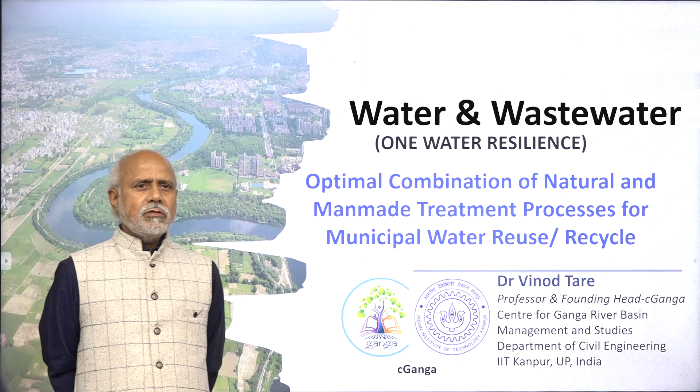This is particularly with the objective of reuse and recycle of municipal wastewater. As is abundantly clear now, municipal wastewater treatment and reuse is an acute need in developing and rapidly urbanizing countries like India.

Typically with increase in water demands and dwindling freshwater availability, as well as increasing wastewater generation in urban centers.

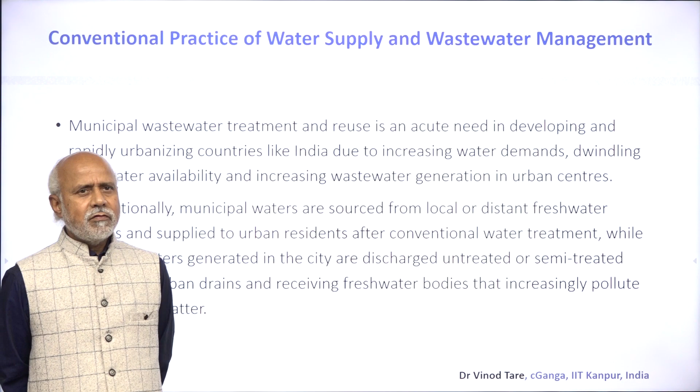These days, almost no surface water resources are spared from contamination with some or the other kind of wastewater, mostly domestic wastewater.

Typically, in most of the urban centers, water is brought from a long distance, and the sewage is also taken over a long distance and treated downstream.

This scenario does not ensure cleaner water bodies in the urban localities. Drains, subdrains, and urban water bodies remain dirty as they were earlier.

Communities do not get benefited from this model. Hence, there is very little incentive or motivation for urban local bodies, ULBs, to spend their limited resources on treatment of sewage.

And hence, ULBs pass on their responsibilities of managing sewage to the state, central, or federal government, in violation of the globally accepted polluter pays principle.

Possibility of achieving appropriate treatment of urban sewage in India is very difficult, if not impossible.

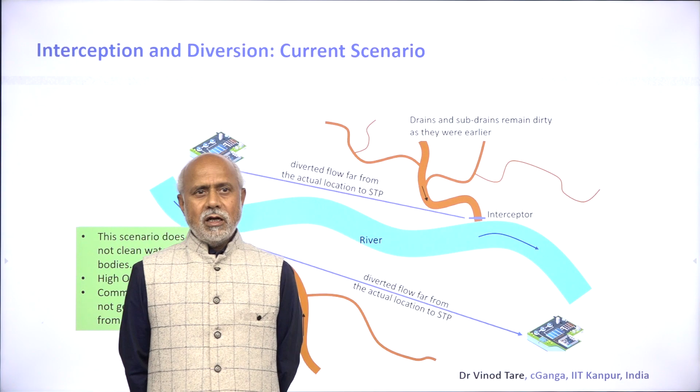To illustrate and make a case for a paradigm shift in our approach, which I believe is also likely to be the case in most developing countries, and I guess in times to come the situation may even develop in the developed world.

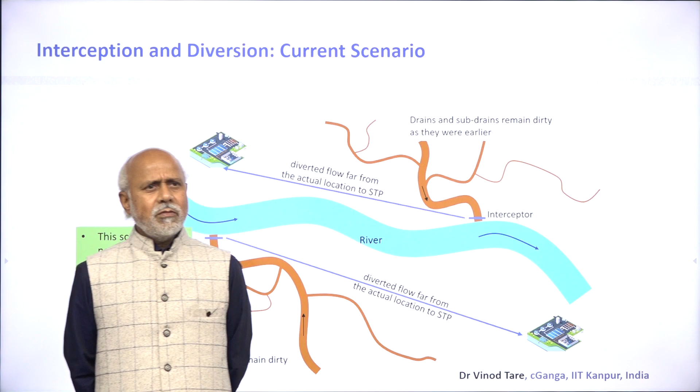I am presenting some estimates before you to justify this.

If you go by the present practice, that is not talking about reuse and recycle, but just treating the wastewater up to secondary treatment, that is following standards of say 30 BOD and 50 suspended solids in the treated sewage, not even talking about nitrogen and phosphorus or nutrient removal.

Then the resources that are required, as per today's assessment, amount to something to the tune of 3.5 billion US dollars so far as capex is concerned, and about 1.3 billion US dollars for annual operation and maintenance cost.

This is just for treating sewage in urban centers in India, and that is just about 18 to 20% of the total population of India.

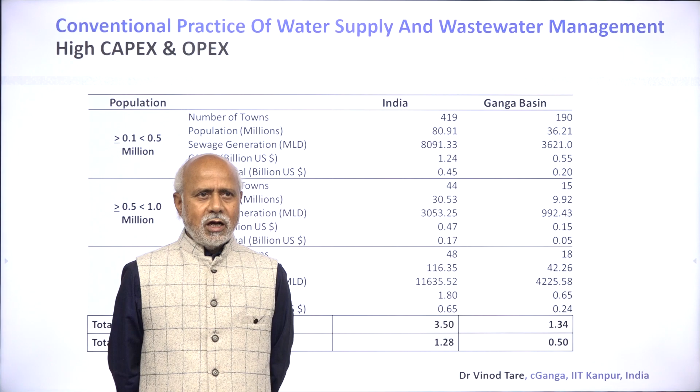That is what, based on our understanding of the situation, I am trying to present before you. With the resources made available, as I have argued, it is difficult even to treat sewage up to secondary treatment.

Not to talk about the recycle level, where advanced treatment including nutrient removal, disinfection, etc. may be required. But the more important question is, if the local bodies do end up managing resources and spend their meager resources, what are they getting out of it?

In the current practice, typically the sewage is taken downstream of the town, and then even if it is treated, it is released downstream.

The situation in the town does not change at all. So there is absolutely no motivation for those towns to spend that much of resources, and that is where we are making a case that we need a shift in our approach.

We have two extremes. On one side, we argue for sewage treatment at least up to secondary treatment, to attain uniform effluent discharge standards across the nation.

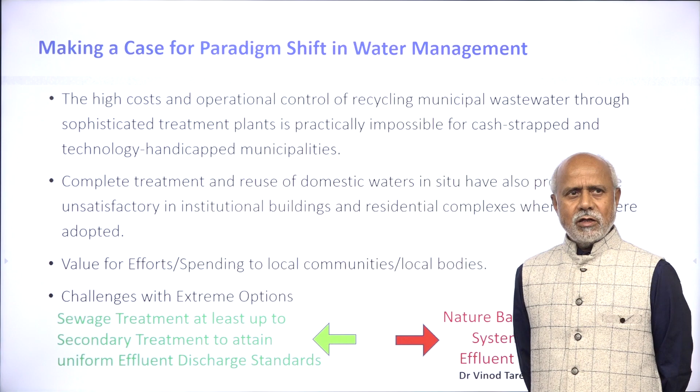That means we have to add some more treatment operations, advanced treatment operations like nutrient removal and tertiary treatment. On the other hand, there is an argument that expenditure on electromechanical treatment systems which have high energy footprint is unnecessary, and nature-based systems which essentially require no operation and maintenance, or least operation and maintenance costs, should be adopted. Very commonly, such nature-based systems are referred to as, very loosely, bioremediation processes, for which as of now no discharge standards or norms even exist.

With these two extreme views, we are not progressing as much as expected, and not sure if we are getting the value for the resources that are spent. And that is where our studies reveal that we must have appropriate distribution of resources for sewage treatment between STPs that are based on

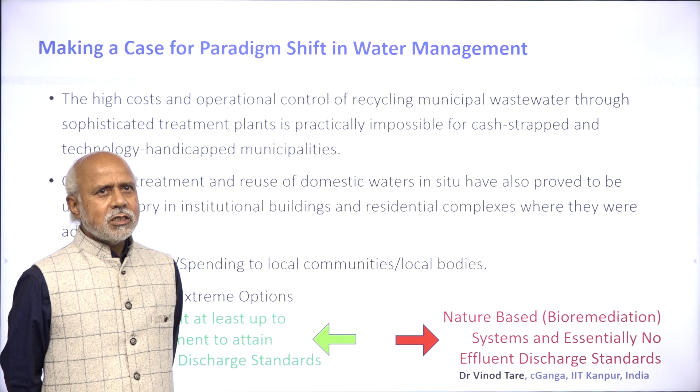This approach calls for decentralized wastewater treatment. So, instead of having one or few large sewage treatment plants, create a large number of small sewage treatment plants, thereby reducing the conveyance cost of sewage, at the same time making sewage treatment plants where water is in demand within the town.

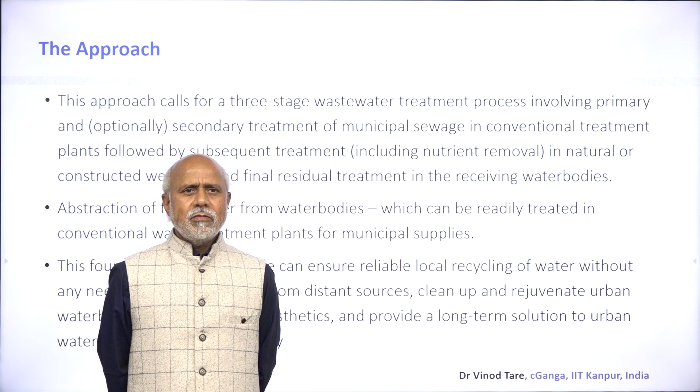Then there is a case for reuse and recycle, and there are chances of increasing revenue water as well. And this will in turn reduce pressure on water bodies. In other words, what we are arguing is: we decentralize treatment, we put the treated water into the water bodies, partially utilize the STPs, and the remaining treatment should be achieved through nature-based systems, be it wetlands or local water bodies, and then take the water from these water bodies back into the municipal water cycle, as is shown here.

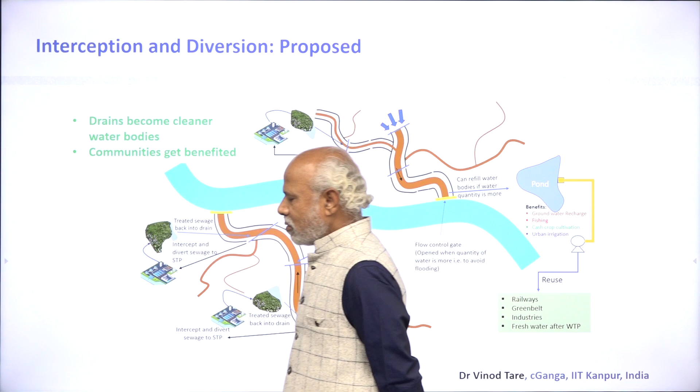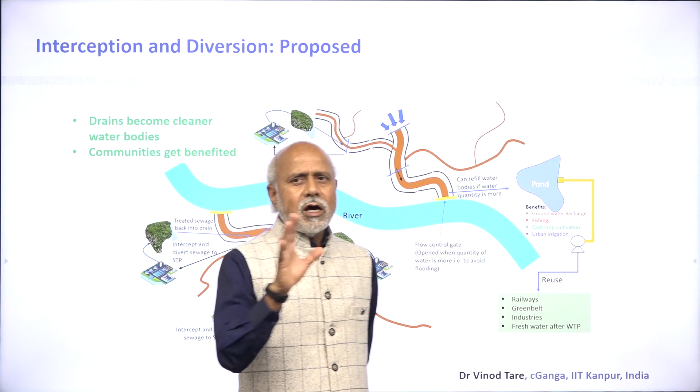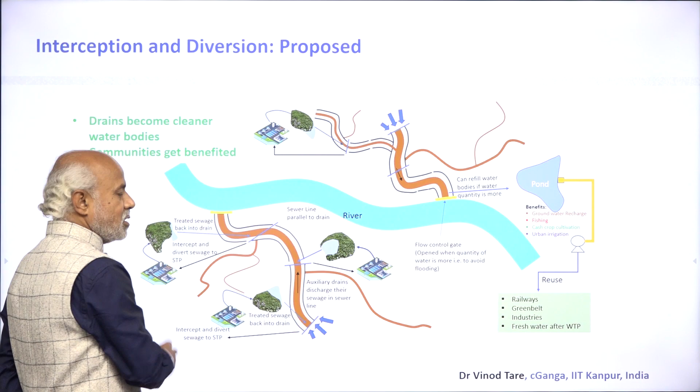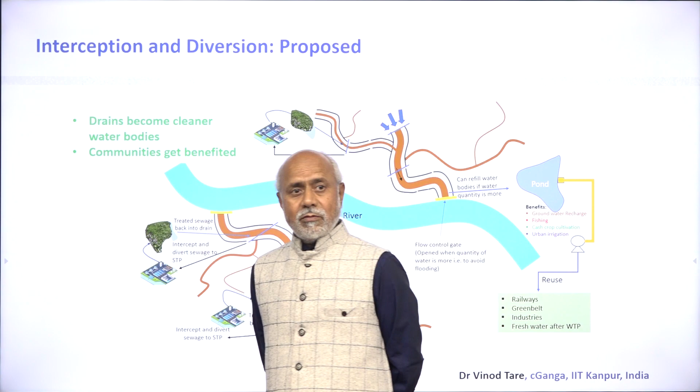So we are looking at a number of small STPs distributed in the town or urban local body, utilizing the combination of electromechanical sewage treatment plants and wetlands, be it artificially made or naturally available, and then utilizing these drains or water bodies within the town itself, utilizing their assimilative capacity and the natural capacity of nutrient removal, etc.

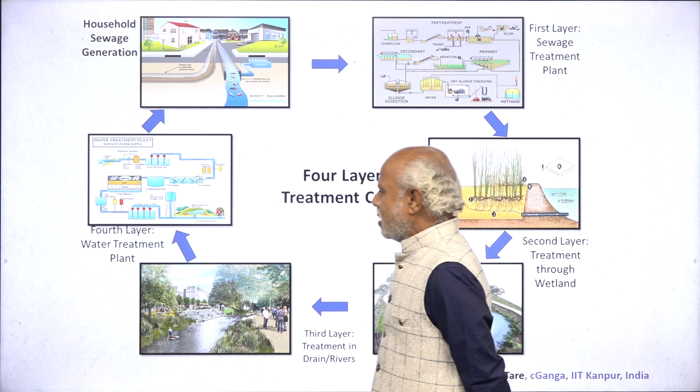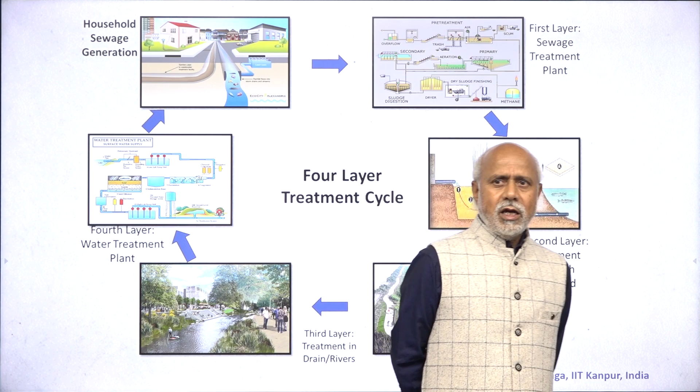If there is an excessive growth which is expected, then we can even harvest that and utilize that harvested growth for energy purposes as well as biomass.

So this is what is shown here, what we call a 4-layer treatment. The first layer is an appropriate electromechanical kind of sewage treatment plant. The second layer is a kind of wetland, be it naturally available or even artificially made, and that can to some extent reduce the load of nutrients.

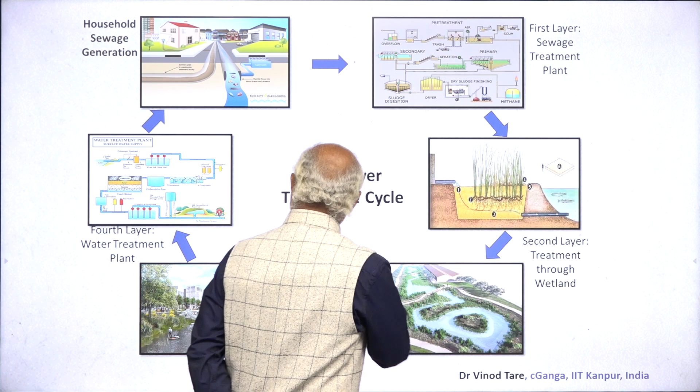And then the water that comes out from this is passed on to the water body, and the water bodies are maintained. Then in the municipal water cycle, we take this water from here and again it passes through the conventional water treatment plant, and then it is reused.

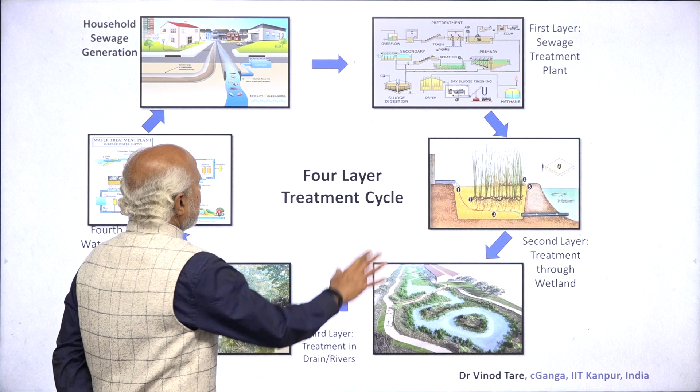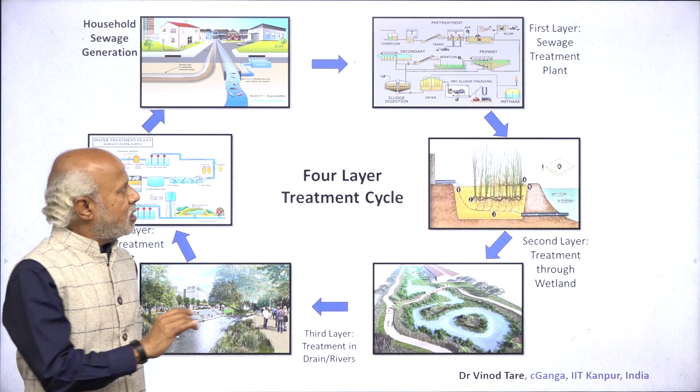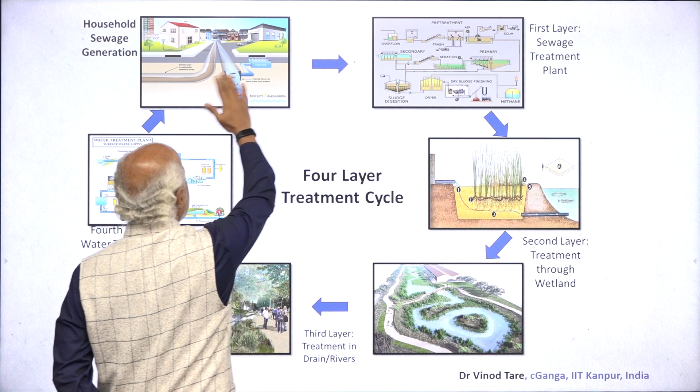The two extremes that we are talking about: one is to avoid electromechanical systems and use only nature-based treatment, that has not worked well. The other extreme is to just rely on sewage treatment plants and treat it to the level where it meets reuse-recycle quality and recycle it back into the system. I think we are missing something here, and this is what

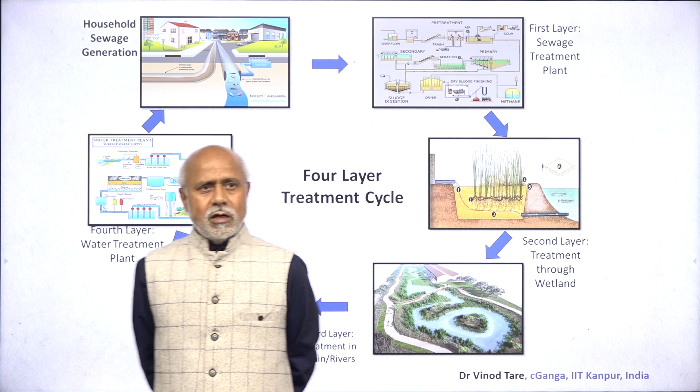we are proposing, and for that we need to make sure that we bring in some kind of policy changes. So this is referred to as the 4-layer treatment. The concept is basically about a 4-layer treatment system, wherein the first layer, as I said, is an STP.

The second layer is a wetland kind of system, whether it is artificial or natural. The third level is the water body itself. And the fourth level is the water treatment.

Instead of directly treating the sewage to a very high level and then using it for recycle and reuse purposes, which by and large, wherever it has been imposed or practiced in India, has not worked that well.

So this is what we are proposing: distribute sewage treatment between the electromechanical treatment system and the nature-based treatment system, rather than adopting the extremities of treating either in electromechanical treatment systems or, in the other alternative, leaving everything to nature. And I would like to demonstrate this through a live demonstration of a household level system.

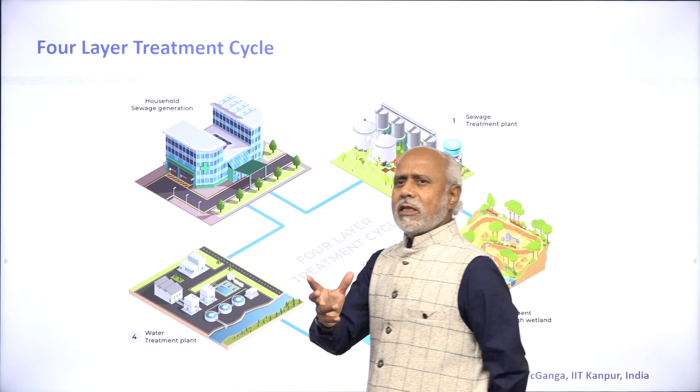So it can be used from a household level to a community level or to a number of communities together, depending upon the situation, the availability of natural water bodies, the availability of land, etc. The major advantage is we are avoiding long distance conveyance of sewage, and we are also making sure the local water bodies serve as a source of water.

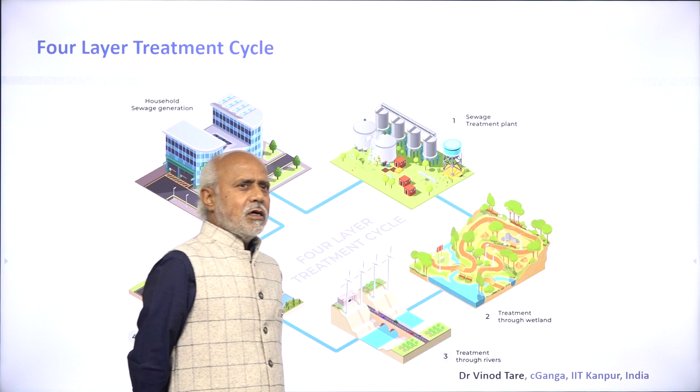To some extent we can even avoid long distance conveyance of water, which is presently brought over a long distance. Let's go through a typical household level system which demonstrates this concept of four-layer treatment. At the household level, sewage is collected and aerated through a system of fountains using a pump, which also makes it aesthetically good, and the treated water is fed into a water body to sustain healthy indigenous aquatic life. In this case, the water body is a small simulated river or channel.

Water withdrawn from the channel can be appropriately treated to suit a particular beneficial use, in this case used for gardening and horticulture purposes. This is a typical micro STP for altering the quality of domestic wastewater from a household. The wastewater is taken by gravity into a central well, which is well mixed using turbulence created by the recirculating water. A submersible pump is the only mechanical device in this system.